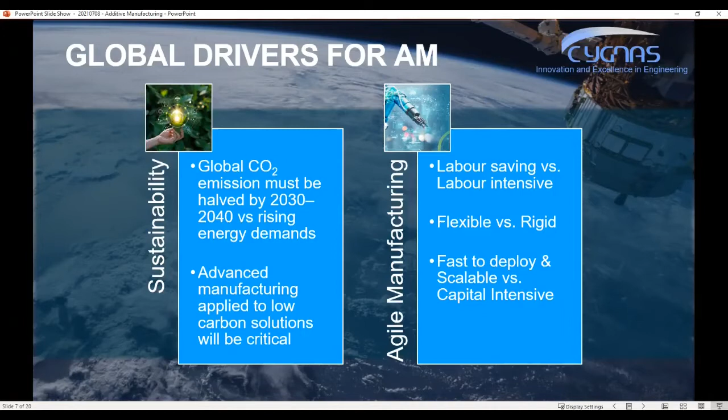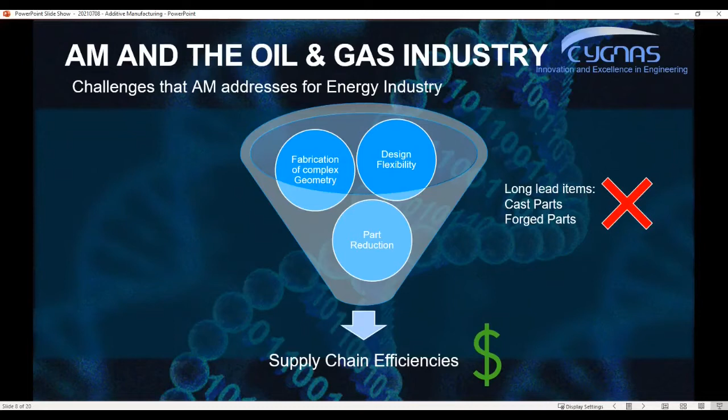Okay, so from the oil and gas energy perspective, there are many areas and applications that can open up. One that we have just mentioned is sustainability, but also fabrication of complex geometry, replacement of parts, spares, reducing the number of parts that you actually require in an assembly, and hence there is saving there. There are a lot of parts that are, for example, cast and forged parts. We've all been there, waiting months and months for forged parts or castings, which in reality could be produced in a very short lead time with high quality results, without waiting for other people to send those parts out to you.

For example, there are parts where there are restrictions on how much you can drill into an object, but with AM, because it's being built layer by layer, you can have very intricate designs, both on the outside and inside, which can be beneficial, for example, for cooling channels or drill holes, or where you need a lot of intricate holes within a structure.

Next slide. So now we're going to be showing you some examples of what has been achieved in the aerospace sector. This is a company. For some reason the video will take a few seconds to load up, Sarah. So we'll show basically how this has already been picked up and used in another sector. This is WAAM manufacturing, which basically uses a kind of directed energy deposition, where you deposit weld material and can then essentially build up layer by layer. Okay, so I'll play this video now.

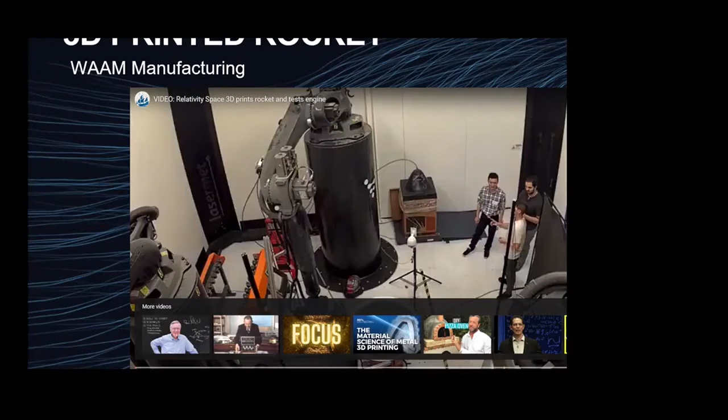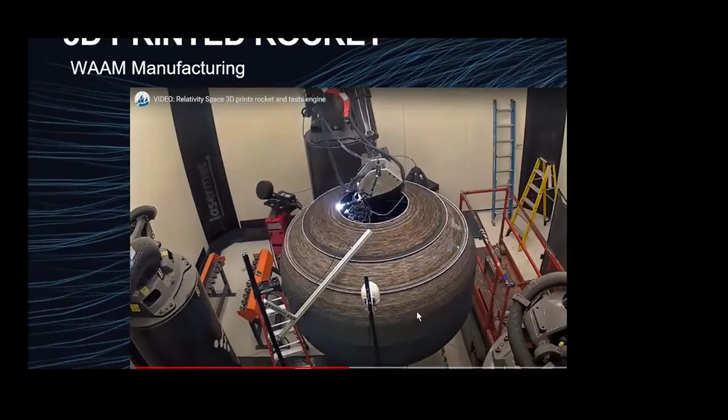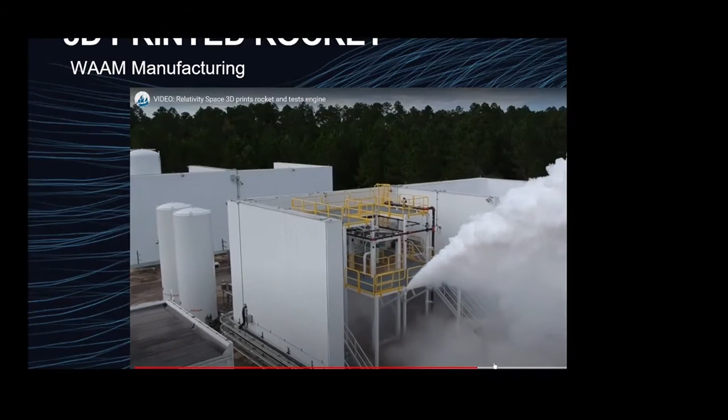So as you can see, you can connect a weld machine to, let's say, a robot, a KUKA robot, anything. And this is a company called Relativity Space, and you can see how they are building this. This seems to be a pressure container, but they can actually use it to build whole rocket structures, pressure chambers, and all kinds of interesting equipment. So what that shows is that the materials used in additive manufacturing are quite robust and able to take a lot of the pressures and loads that you would expect in, let's say, oil and gas.

The second example uses another technique called direct metal laser sintering, which is a kind of powder-based format. You have powder in an enclosure where a laser is used to build the whole thing layer by layer. This is one of the techniques that gives the best strength results, with reduced overall stress, higher quality, higher density and less porosity. So it is used in highly critical applications. The size has been traditionally limited, but now we're getting larger and larger 3D printers.

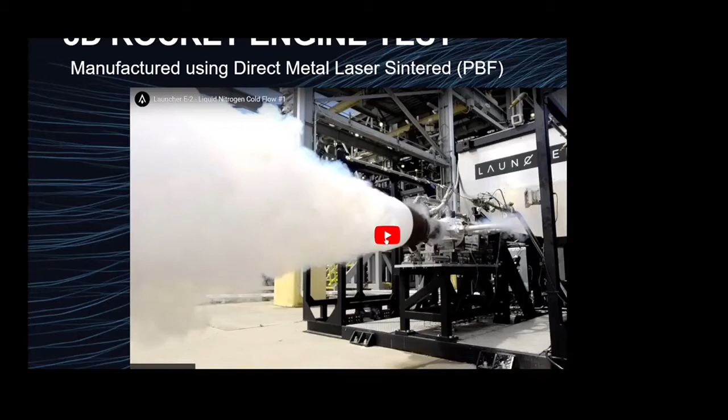So this again is a US-based company called Launcher that used a 3D manufacturing technology called DMLS, based on a machine made in Germany. Yeah, so I can show you this quick video as well. And this is just a video of a test of the rocket chamber.

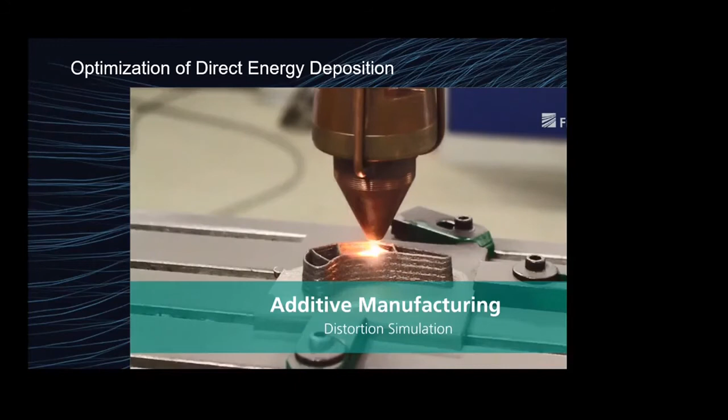Okay, so moving on to the next slide. This is again showing your additive manufacturing with layer by layer being added. This is again based on direct energy deposition. And you can see how the simulation can be used to predict your residual stresses and your distortion, which is quite important.

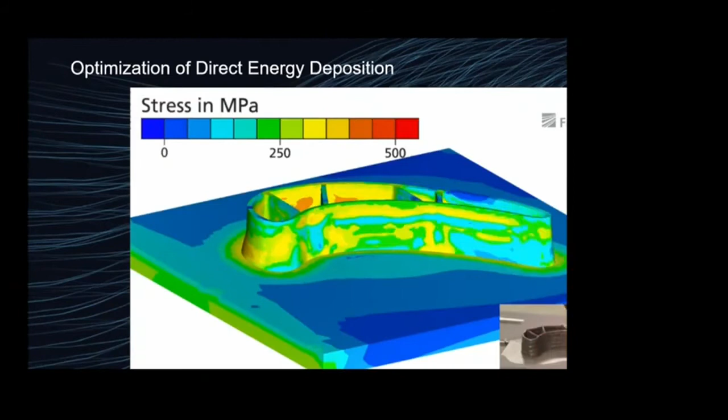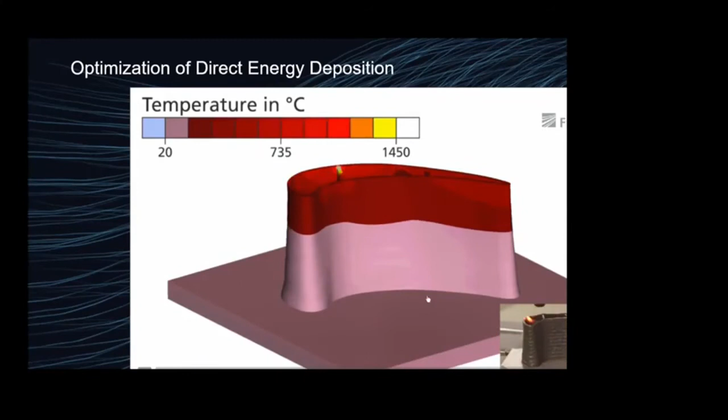And sometimes you need to know how your part needs to look at the end, and then there is some iteration. So especially for larger parts, it becomes important to be able to simulate it in a virtual environment before you actually manufacture parts, so as not to get the part out of the tolerances that you require. Okay, moving on to the next slide.

Yes, so in this regard, we can use two softwares that have been optimized for simulating additive manufacturing processes. Some of the ones that we have just shown you are arc welding, which is WAAM, and direct energy deposition. But these are not the only ones that can be simulated. So you can have powder bed fusion, which is the one that we showed for the DMLS, that uses powder layers that are laser sintered on top of each other and then later heat treated.

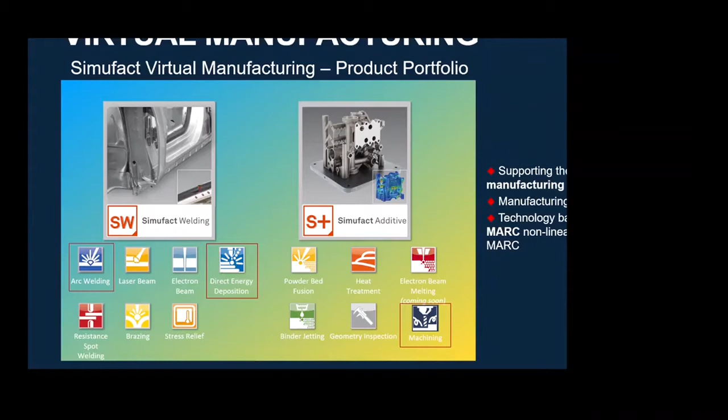So we're able to simulate all of these processes using Simufact Welding and Simufact Additive, which is quite important. They're essentially based on MSC Marc technology, which uses a non-linear FE simulation to be able to simulate the multiphysics of heating, cooling, and even possibly phase changes. Next slide.

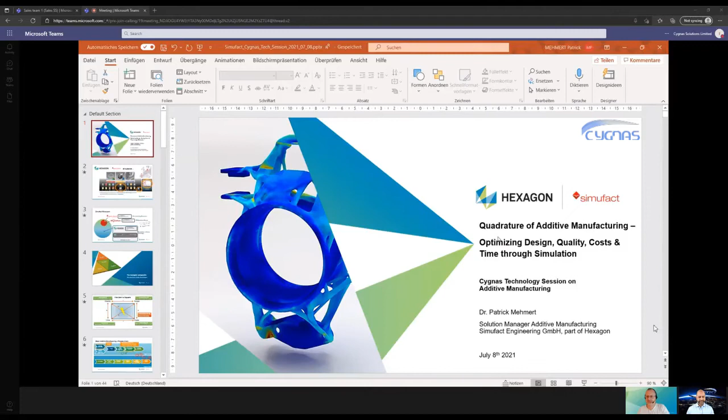Okay, so welcome, Mr. Patrick Mehmert, happy to have you here. I can present now? Yes. Okay, let's try. You can see it? Yeah. Great. If there are any issues, let me know. I will start now. Great. Thank you for the introduction.

So I'm Patrick Mehmert from Simufact Engineering. We are part of MSC and of course also part of Hexagon. And I want to talk to you about the quadrature of additive manufacturing. So how to optimize design quality, costs, and time through simulation simultaneously.

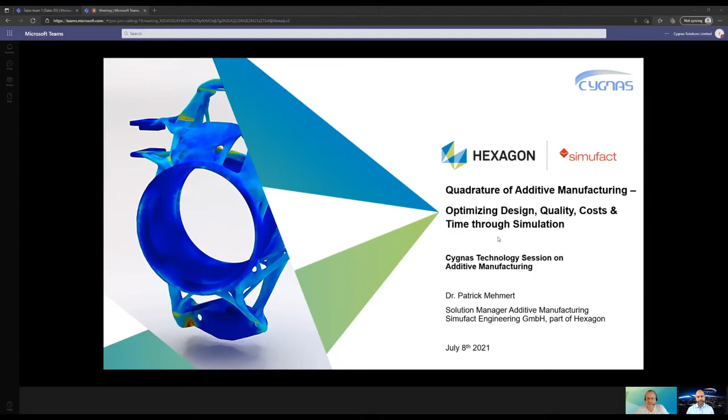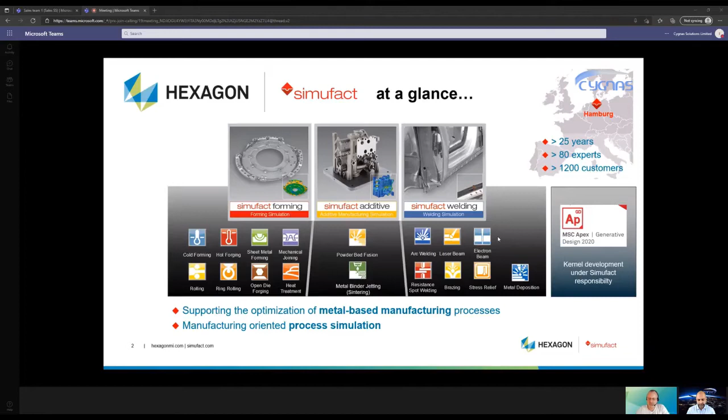So just very quickly, a brief introduction to our company. We are based in Hamburg. We had our 25th anniversary last year. We are a medium-sized company, but we have global business, more than 1,200 customers. Our history is based on forming simulations, one of the most important products we have, but since 2016 we have Simufact Additive, which is able to simulate powder bed fusion processes. There are different names for it, but we call it powder bed fusion. It's a general naming. And also the sintering of metal binder jetting, which in fact is also a powder bed process.

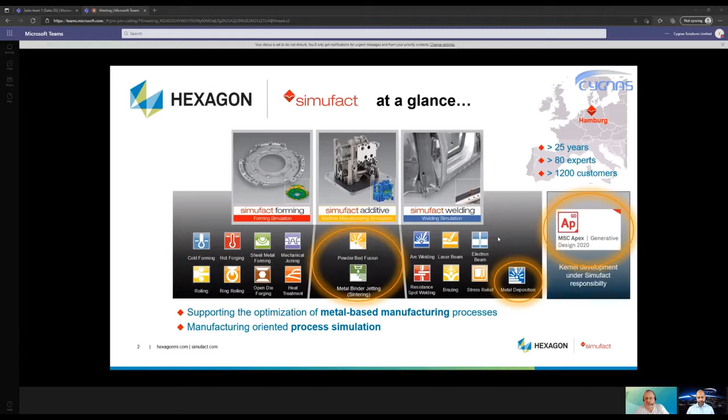In our welding simulation, we can also simulate metal deposition or direct energy deposition. And what is also under our technical responsibility is the kernel of the MSC Apex Generative Design, which is very useful to create really innovative designs for additive manufacturing, which might only be producible with additive manufacturing. So let's go to the topic of today.

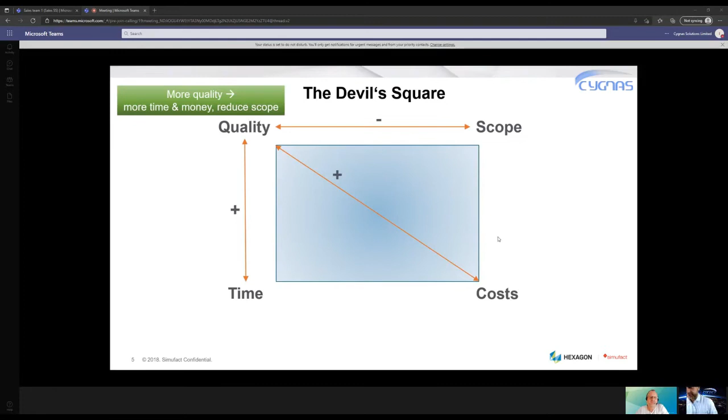So we talk about additive manufacturing, but what is the manager's perspective? They think about cost, quality, time, scope, not necessarily about nice designs. But of course, this is the basis for that. So we have the devil's square of project management. We want to achieve the scope of our project, we want to be on time as fast as possible, and we want to have the least costs possible. To achieve that simultaneously is maybe not possible. It's a challenge at least.

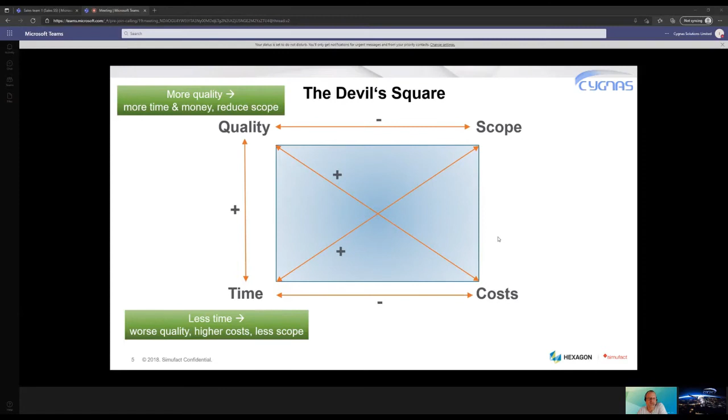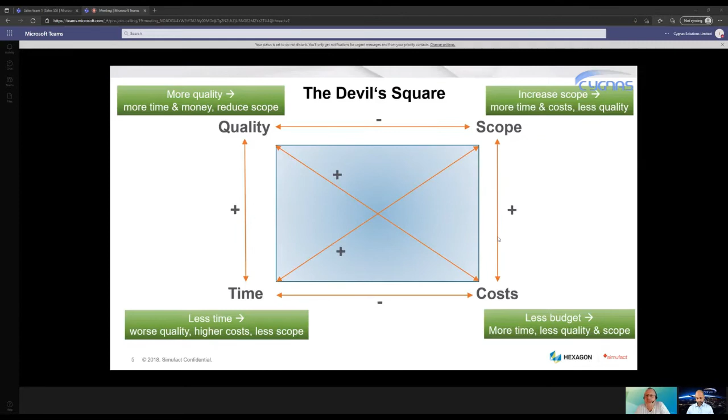So if you want to have more quality, maybe you need to invest more time and money, or reduce the scope. If you want to reduce the time, you might worsen the quality, live with higher costs, and also reduce the scope. If you have less budget, you will need more time, deliver less quality, and maybe have shortages on the scope. And when you want to increase the scope of your project, you need to invest more time, more costs, but you have a fallback on quality.

So in the end, let's talk about the metal additive manufacturing process chain. We concentrate on metals because you need to invest a lot of money to print metal, unlike with plastics. So simulation is really worthwhile here. Often you start with a topology optimization to really get a design for additive manufacturing. Or another application is that you do an optical scanning for reverse engineering, for example, for spare parts.

So really two completely different applications. But in the end, you need to derive a design out of that, because normally you don't get a final design. So you need some designer to do that for you. And then we have the classical way. You do a static strength and fatigue simulation. And of course, MSC has fantastic tools for that, like Nastran, Marc, CAE fatigue, and so on. So this is very classical, but also very important.

And then what we offer as Simufact is the manufacturing simulation. So maybe something that is underestimated still by some people, but it's not only designing and calculating things, you also need to manufacture it. And a lot of things can go wrong, but with simulation, you can improve that. Then when you're happy with your results, you need to go to a build job preparation. The part needs to be sliced, and you need the hatching patterns of your laser and so on, and there's special software for that.

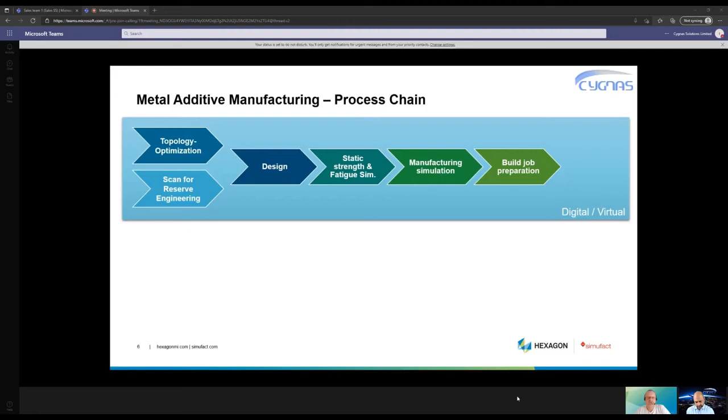And the nice thing in additive manufacturing is that all this is done in a digital virtual way. And that means when you now go on, you will switch into the physical or the real world. So you do the 3D printing, you generate the part. Now you're physical. You do a stress relief heat treatment normally. You need to cut off the plate. So you have a base plate in production normally where you print the part upon. You need to remove the supports that are needed for the manufacturing. You need to do a surface finishing, for example, machining, which is quite common, and a quality control.

So what does this mean in terms of time and costs? So in the digital world, it's quite easy. You can iterate fast, and this will not cost a lot. But if you need to do that in the physical world, so for example, if your print job does not work, if you get scrap out of the machine and you need to reiterate, this is very, very costly and very, very time consuming. And this is really where simulation helps you, because if you are able to prepare your print in the right way, in the digital thread, then you are done also with the physical world.

Okay, so today I will talk about topology optimization, which in our case is the generative design. This one is already covered, so I will not talk about it.

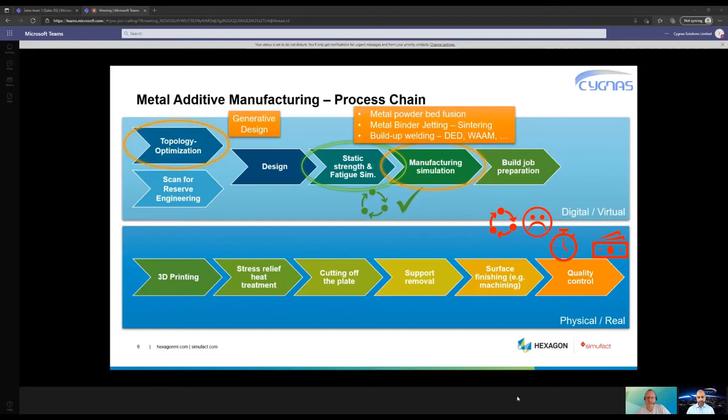So this is the classical way. So this is Nastran, Marc, and CAE fatigue. I will not talk about that today. Of course, I will also present to you manufacturing simulation in terms of metal powder bed fusion, metal binder jetting, sintering, and the build-up welding applications. So let's go to the different topics.

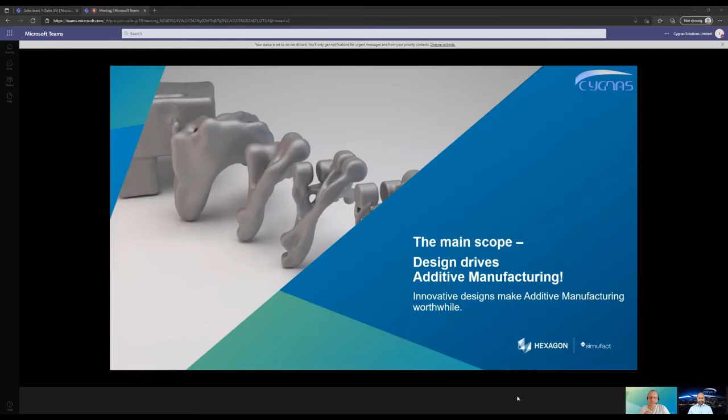What is the main scope of additive manufacturing? You need a nice design. So the innovative design really makes additive manufacturing worthwhile, at least when you create a new part. Of course, it's a different story for spare parts, maybe. Spare parts, you have more like a reverse engineering application. So this is a nice example for a generatively designed part. And what are the objectives and the goals? You normally want to achieve lightweighting, you want to be efficient, you want to reduce time to market, and of course you want to reduce costs.

In this case, there was a 63% weight reduction compared to the original design. Reduced fixation points to 4. I think there were 5 or 6 in the original design. You have one integrated part design, which of course helps in lightweighting. And what is really the clue, this part, as you see it here, has been designed in only 3 hours. So you don't need a designer that is doing that for you. The software gives you the final part that can be printed.

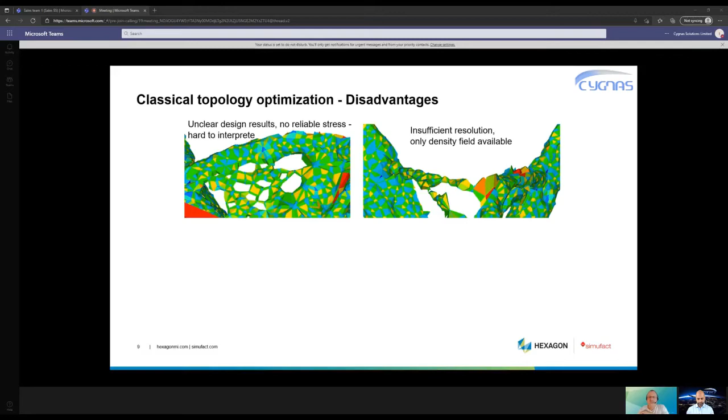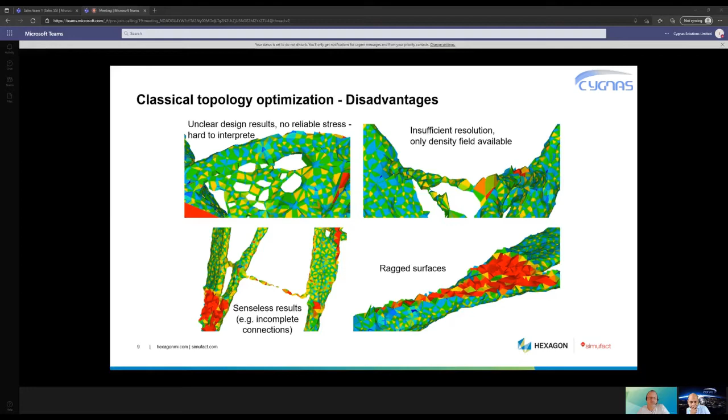So what are the disadvantages of the classical topology optimization? You do not get clear designs. You do not get stresses, and it's hard to interpret what to do with your results. You don't have a sufficient resolution. You get a density field and not really a design. Sometimes you get some senseless results, for example, like this, an incomplete connection. And you have these ragged surfaces, and that is the reason why you need a designer in between to interpret your result and make a design out of your topology optimization result. And this is different in the generative design.

So in this innovative approach, you have a design evolution during the optimization, you have an iterative refinement, and in the end you have a fine smoothened mesh, and you can also export a generic CAD format. And what is the difference?

In classic topology optimization, you don't have a design as a result, you have a density field. You have no stress information, or at least no reliable stress information. And in this case, the stiffness is the target, not the weight. That is the reason why weight is normally reduced by 50%, because people give this as a target, but it's not really a result. In the innovative topology optimization, which we call generative design, you have a final printable design. It's already stress optimized. It's weight optimized in the sense that automatically the least weight is achieved, and it's far quicker.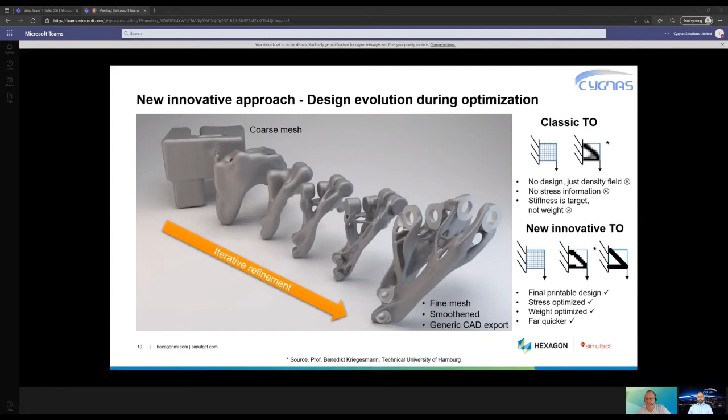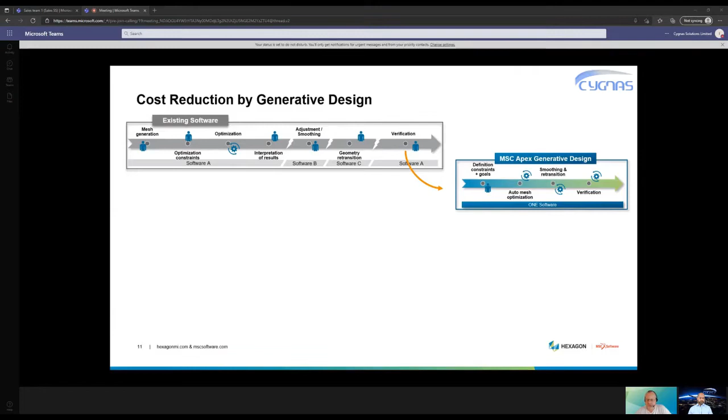And of course, this will help you to reduce the cost by the generative design, because in existing software you need different softwares for the mesh generation, optimization, and then again for the smoothing of the part, geometry retransition, verification. So you need to go back and forth, maybe you need different people doing that, and they spend a lot of time. With MSC Apex Generative Design, you have all that in one tool, and you can do it very, very quickly. So the reasons for that is that you have an automation, you get the maximum lightweighting, you achieve really a dramatic time reduction, and this all helps you to save money.

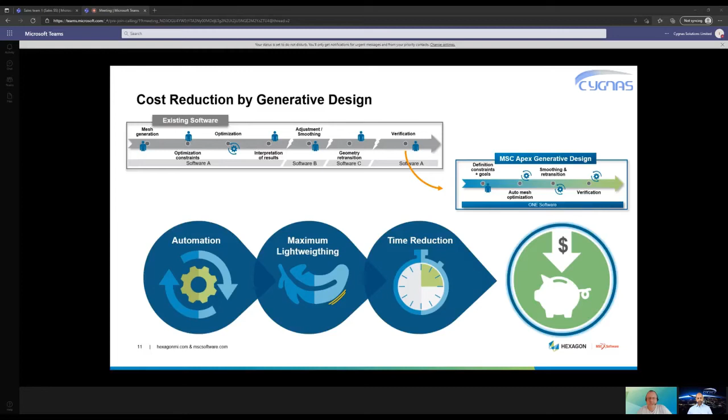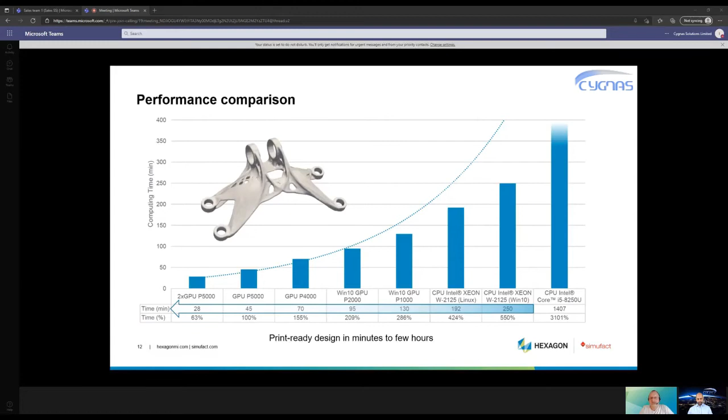So let's have a closer look. If we look at calculation times, for example, the kernel has been developed for GPUs. So this is the fastest way. And in this example, it was possible to get this final part in only 28 minutes. Of course, not everybody has the same hardware. So maybe you don't have a GPU, you have a CPU, but even then, it's in this case like 3 hours. So compared to other technology it's very, very fast, because it's completely automatic. You just start it, and after 3 hours, you have your result print ready.

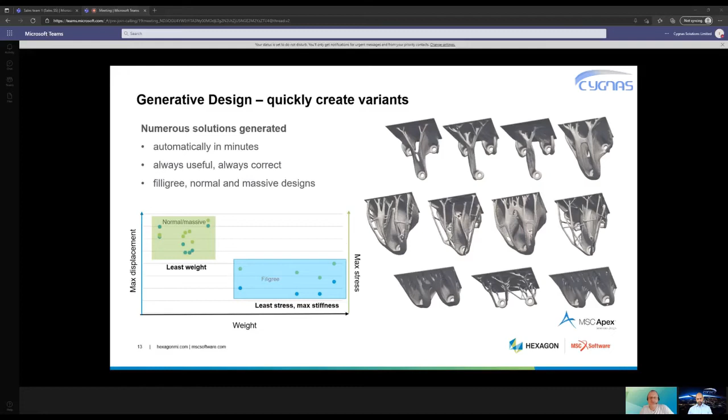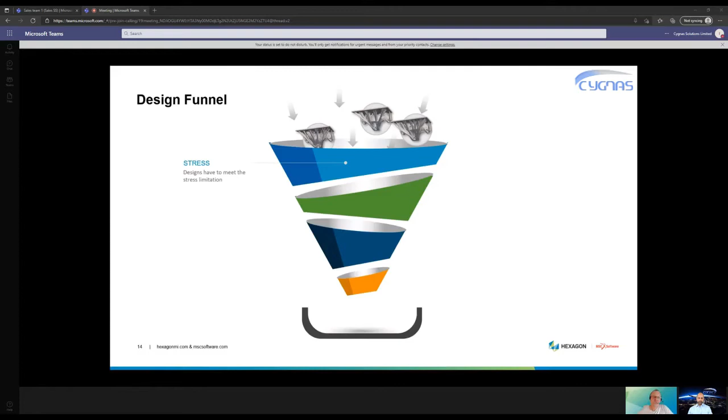Why is it called generative design and not just topology optimization? Because you can derive very quickly different variants of your design. So here's just an example for that. Each design is fulfilling your requirements, but you can even select, let's say, your preference here. And this is what we call the design funnel. So you have a lot of designs which fulfill your stress requirements, for example. But maybe you have other requirements like weight. So maybe you want to select the least weight part.

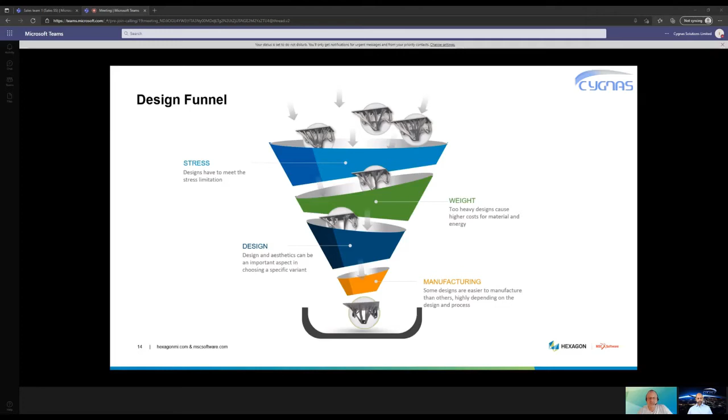Also, the design itself. So how it looks might be a requirement, for example, if you can see the part, an exterior part. And also what part is better to be manufactured. So in the end, out of a lot of designs, you can select really the most appropriate one for you. And this is done all in MSC Apex Generative Design. So it's really one seamless optimization workflow from CAD to CAD.

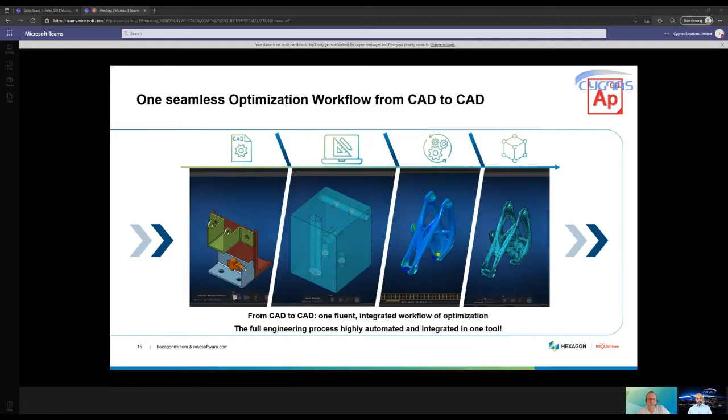So just a graphical example here. You can do all the CAD import manipulation here, including the design space. You get the results and also the CAD export in the end in one tool. So this is what we call an end-to-end process, and we don't need to go into all the points here. But what we covered is the beginning here from 1 to 5. You can do everything in MSC Apex Generative Design. Then you have your print-ready part.

But then there's another step, which we call manufacturing validation. So this is the next point I will talk about. And this is done with Simufact Additive. And then, of course, you can also do a final design validation with Nastran, for example. You already have a stress optimized part, but we call it a pre-assessment, and the final assessment is not necessary, but is a good idea to really have Nastran results and not topology optimization results.

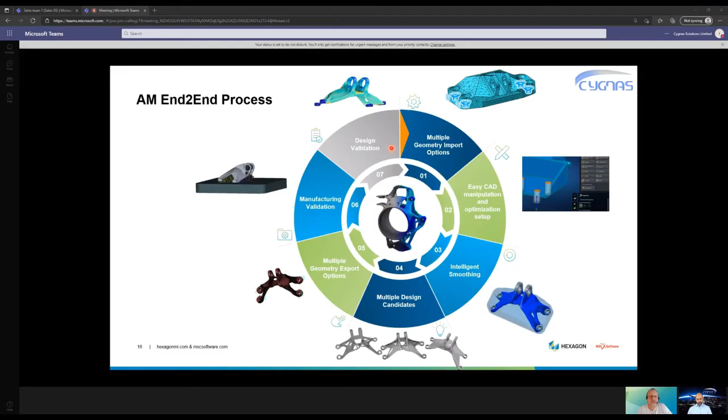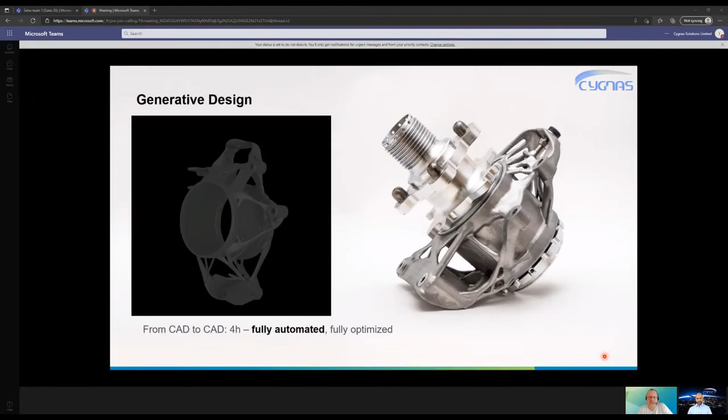Okay, let's have a look at some use cases. So this is a wheel carrier from a Formula Student car, I need to mention. And this one has been designed fully automated, fully optimized. So really, really quick.

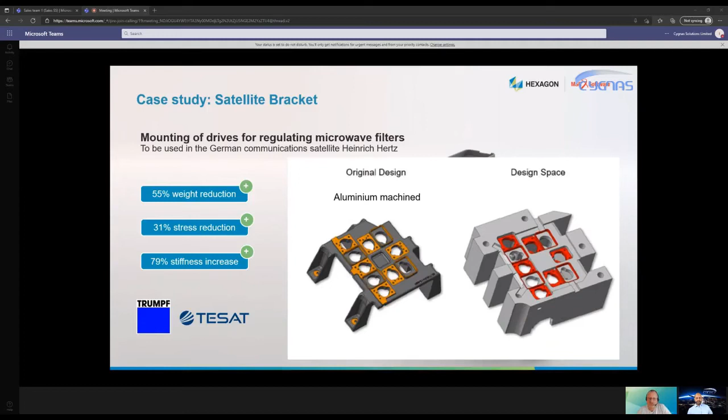And also you see the design space here that was used for the topology optimization. And in the end, you got this part that has been additively manufactured in laser powder bed fusion. The aluminium alloy is different, of course, because you have another process, and it's a typical AM alloy, aluminium, silicon, 10 magnesium, that has been used here. And you see the benefits on the left. You have 55% weight reduction compared to the original design.

On top, you have 31% stress reduction, though you have not even half of the weight. And also you have 79% of stiffness increase. Yeah, so all the parameters have been improved by the optimization.

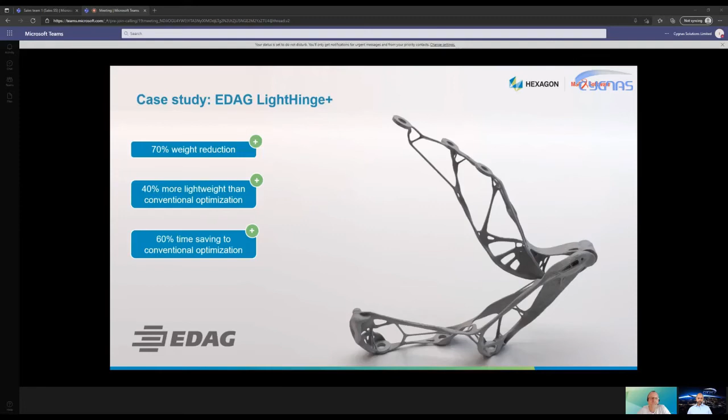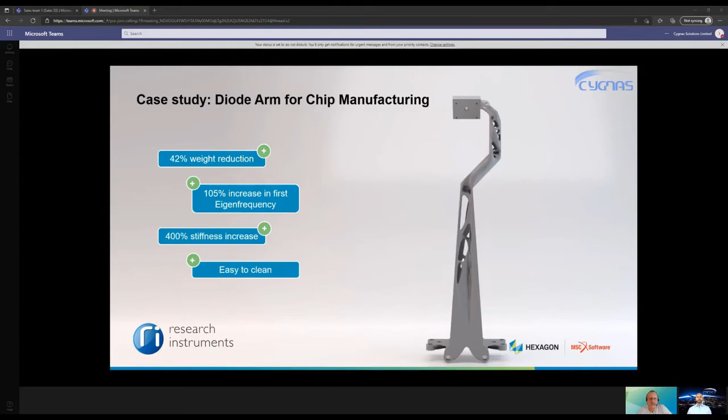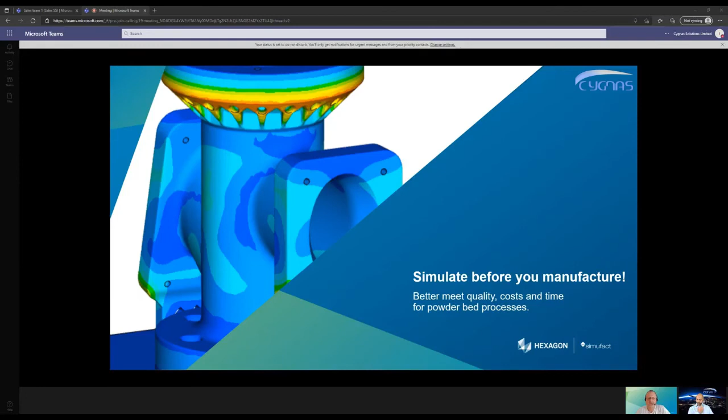Okay. Now let's assume we have the design. So either we have generated the design, or we have scanned the design maybe, because we need to produce a spare part. And now our advice is simulate before you manufacture. So this can be done with Simufact Additive. And what are the key capabilities and benefits of Simufact Additive? In additive manufacturing, it's very crucial how your build orientation is, and the software provides a quick assessment of all possible orientations, and you could select the most appropriate one according to your requirements. You have an embedded cost estimation, so you can also optimize versus the production costs, or give a quote, for example.

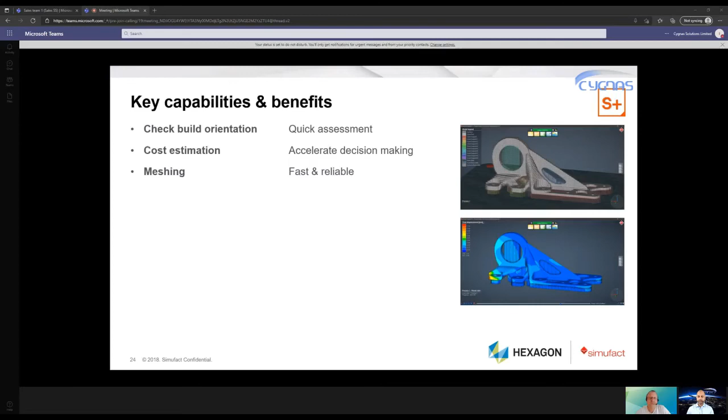The meshing is absolutely fast and reliable. So in additive manufacturing, and we have seen that before, you have complex filigree parts most of the time. We use this voxel meshing with some technical tricks in the background to make it numerically reliable. So it's just pressing a button and everything is meshed quickly and automatic and reliable. So it's not possible that the meshing fails like in other cases. Support structures are a very important topic in additive manufacturing. You can create support structures with the software, and you can optimize them, of course, also simulate, assess, and so on.

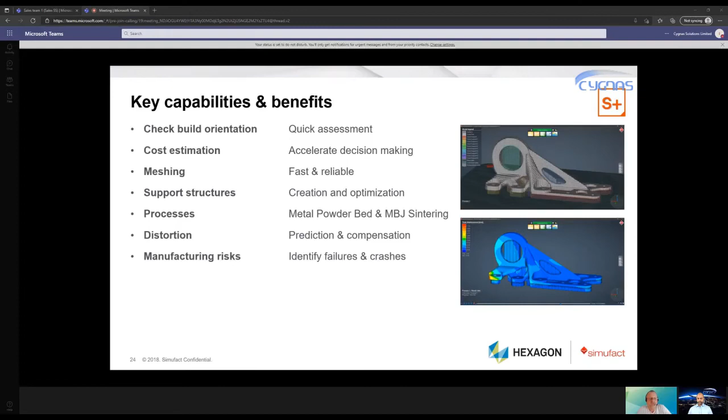Which processes are we looking at? As already mentioned, metal powder bed and metal binder jetting sintering. And what are the results? What is the outcome? So you can predict the distortion, and what is even more important, you can compensate it in a very nice way. So you can print your parts straight, instead of having distorted parts out of the machine. You can assess the manufacturing risks, identify failures and crashes, and mitigate them before you print. So stay in the virtual world, optimize the print, and then go to the real world.

And also you have a look at the process chain. So it's not only printing a part, you have a lot of post-processing steps that you need to consider, like the stress relief, heat treatment, cutting from the plate, support removal, and so on. And all this is covered by the software.

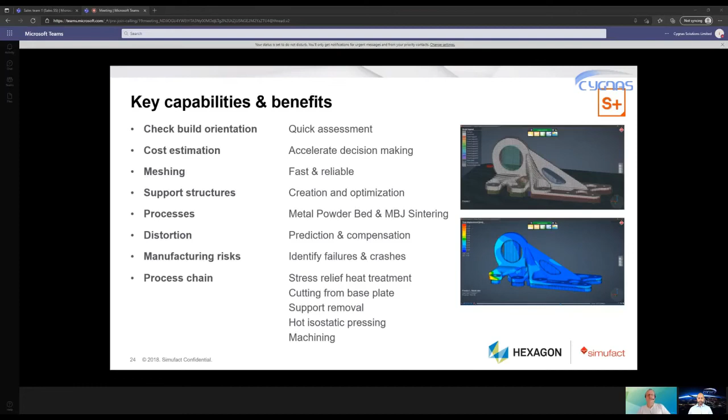So very quickly, we go through the different criteria here. So we have the build orientation assistant, that you can optimize your print orientation versus supported area or the support volume, because you need to print and remove everything regarding the support. So it's additional effort you want to minimize. You can minimize the projected area to put as many parts as possible into the machine. Design height and costs can be minimized, or also local minima, if you want to avoid that. So you have a very intuitive interface here to select really the most appropriate orientation.

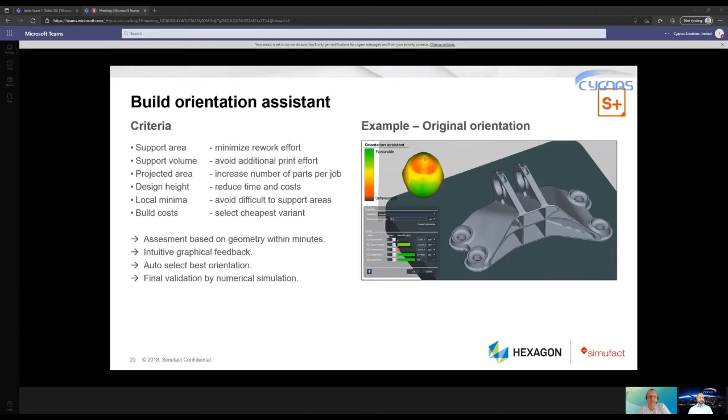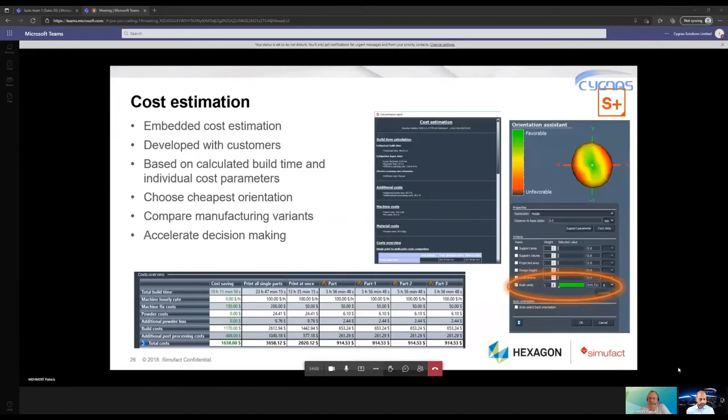Embedded cost estimation has been developed with customers that are doing production, and this really helps you also to optimize against costs, not only quality.

So in the metal powder bed fusion, there are different ways to simulate. And one, or the most popular way, is what we call the mechanical simulation, which sounds a little bit strange because we have a thermal driven process, but you can reduce this to a mechanical problem, and that makes a simulation really fast. But still the results are very good and reliable.

You can see this on the slides. On the left side, you have simulation results. On the right side, you have measurement results, and they are matching really well. And also on the bottom middle part, you see a correlation between measuring points which is really, really nice between the simulation and the measurement. So it's a very reliable way to simulate. Calculation times are typically dependent on the model, of course, some minutes, few hours, not more.

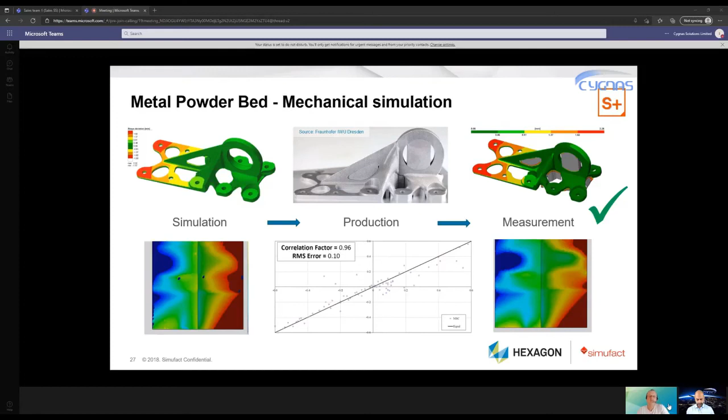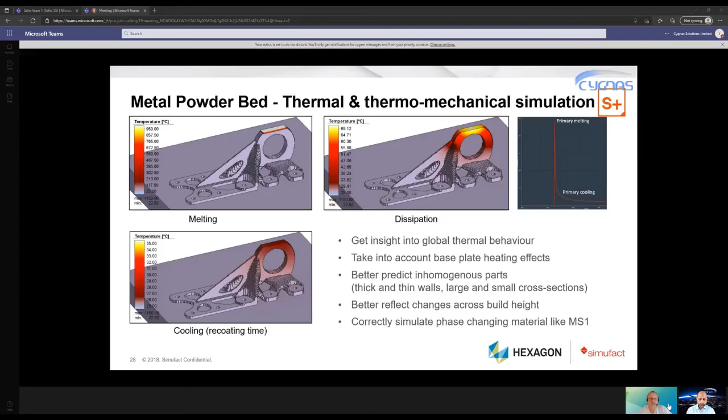But there's another way to simulate this type of additive manufacturing. You can do a thermal simulation to get an insight into the global thermal management of your production. And also you can do a thermomechanical coupled simulation, which is a different approach. It will take more time, of course, but you get a deeper insight. And also you can do things like phase transformation here, for example, and get a better understanding of your printing process. So both methods are suitable to identify manufacturing risks.

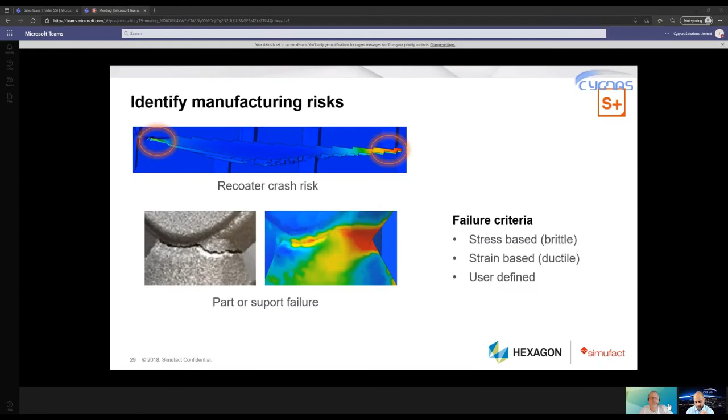And what people fear most is a recoater crash. So you have these recoater blades that are applying the powder layer by layer. And if it crashes with an already produced part, then your production stops. And that is really the worst case scenario. This can be predicted by the software. Also things like part or support failures, which are stress or strain driven, can be assessed and mitigated before you print. When you look at the subsequent process chain, some examples here.

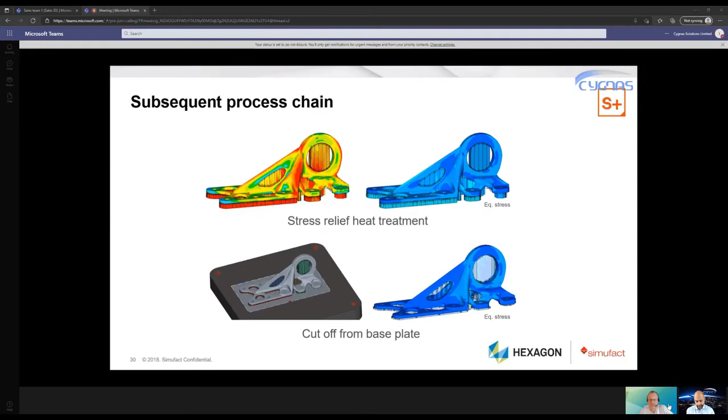For example, stress relief heat treatment, of course, you have a significant stress reduction, but a lot of times you still have some stresses. And when you cut off the plate on the bottom part, you have an additional stress reduction, which is linked, of course, to an additional deformation. Yeah? And you need to know that before you print. And you can also compensate that. So you can compensate in a way that after removing the part from the plate, it is straight and it is within your tolerance. It is a really very nice application.

Support removal can have an influence on your part. Not really on this one because it's quite stiff, but it can. And also, but that is more an aerospace application, maybe hot isostatic pressing has another influence on the distortion, on the stresses, and of course on the densification of the part. This can also be simulated.

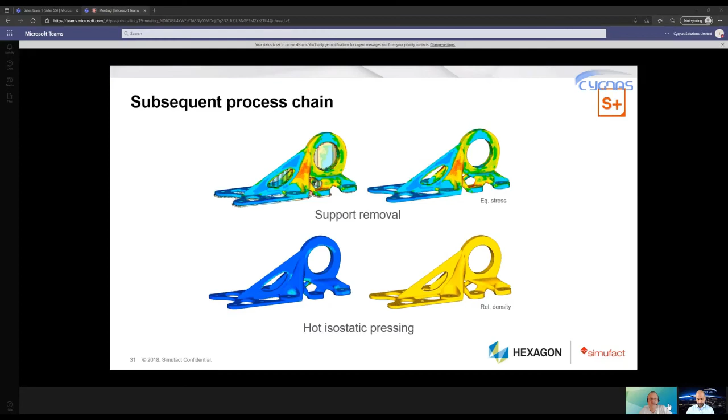Apologies, Patrick. I know we started late, but if it's all right, we just have 5 minutes left from your presentation, just so we have enough time to answer any questions at the end, if that's okay. Yeah, try to be quick. I think there are not that many questions, so yeah, just, you know, take it. No need to hurry too much.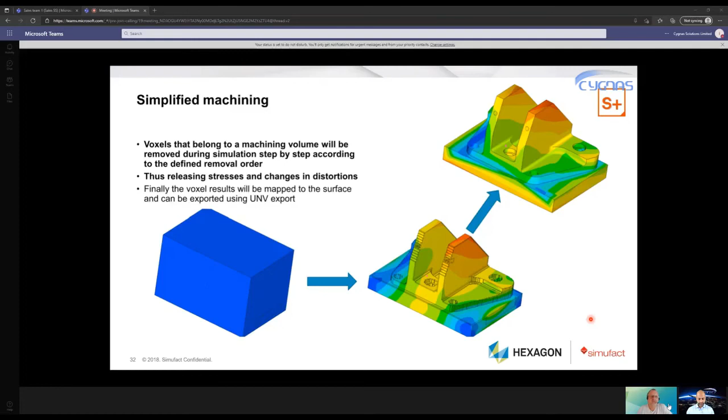It's fine. Yes. Okay. So by the latest release, we have introduced also a machining simulation, which is funny because we have an additive manufacturing and of course included a subtractive manufacturing, but it's a typical post-processing step that can also be simulated. And in metal binder jetting, we have the sintering simulation. So in metal binder jetting, you do not have a laser that is melting particles, but you have a binder agent that is binding the powder particles. That means you have a sintering step afterwards.

And during the sintering, you have a very high densification of the part. You have a high shrinkage. But the shrinkage is not uniform, and that means you get a distortion while it shrinks. And this is also a challenge, but you can address this with simulation. So we can see the videos here, how the part shrinks, and this is unscaled, so it's scale 1. So you have like a 30 to 50% shrinkage. You can predict that, and you can also do a compensation

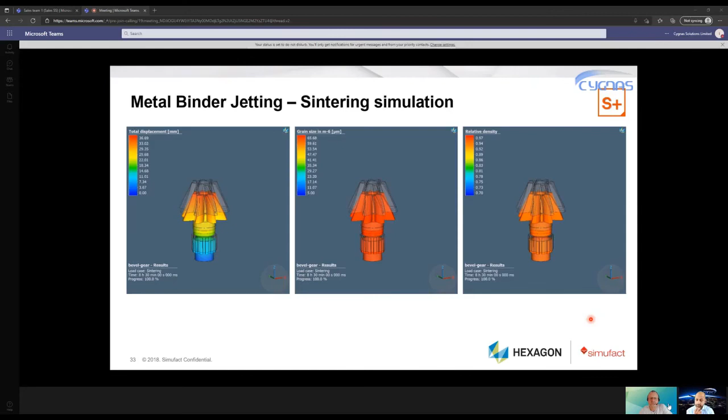for this. So this distortion compensation is really like the killer functionality of the software. You can do it in an automatic iterative way, which really gives very good results. You can almost drive your distortion to 0 by applying localized pre-distortion to your part.

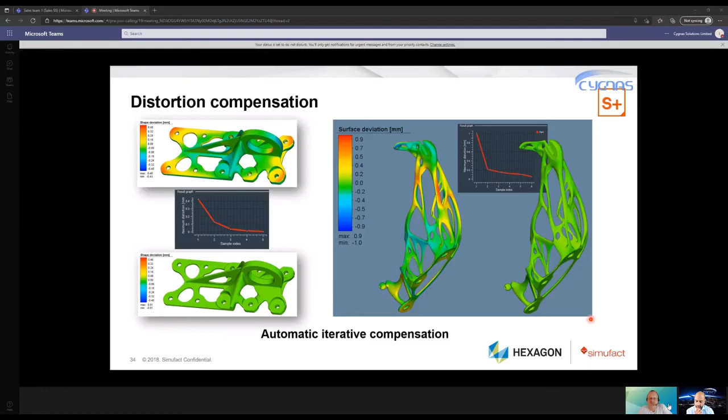Okay, when we now have a look at the generative design in combination with the manufacturing simulation, then the generative design might put out a lot of suitable designs. But then you can do the manufacturing assessment, and maybe some designs are not as suitable as others. So you make a pre-selection here. And then the final selection can be on price.

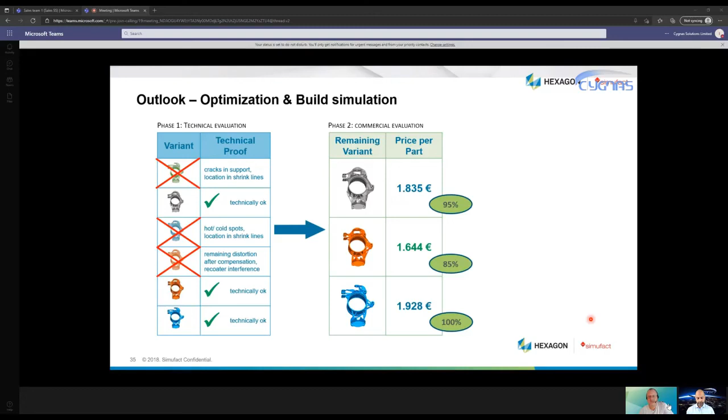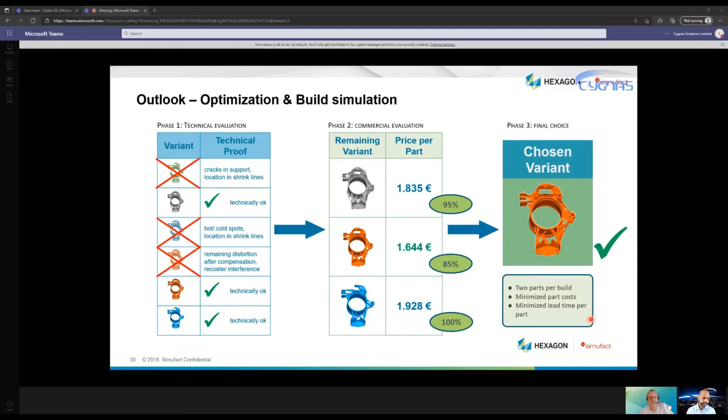So of course you use a part that is fulfilling your requirements, that is manufacturable, and that has the least cost. So in the end, you really get an optimized part, not only in terms of functionality, but also in terms of costs. So this is a very generic return on investment example. For example, if you use the software and you can avoid a lot of crashes or a lot of quality issues, then a return on investment within 1 year is the normal case and not the exception.

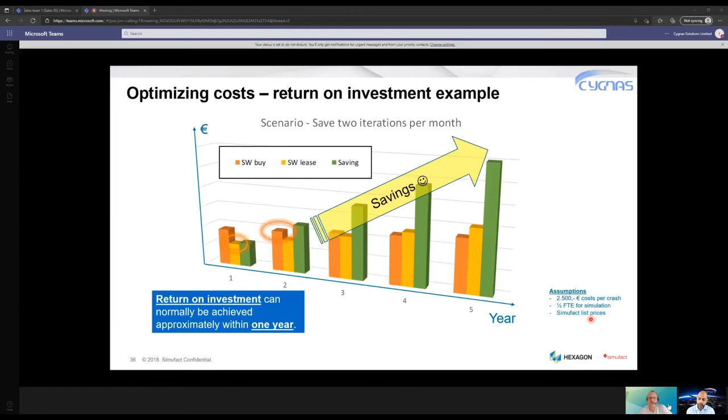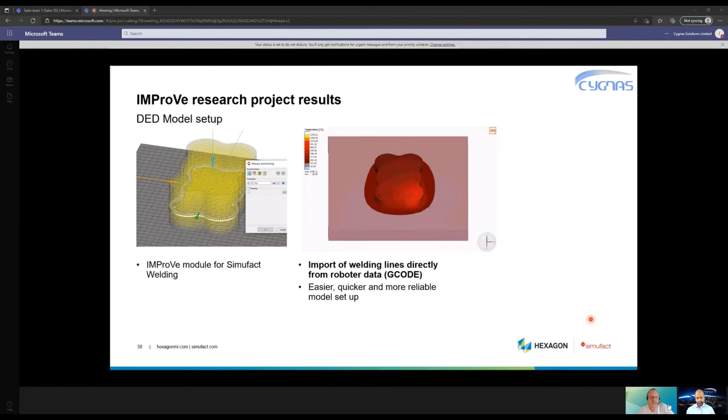Okay, let's talk a little bit also about directed energy deposition. I think Kura mentioned that at the beginning. You can do that with our welding software. Of course, calculation times can be very long still, but the modeling time has been reduced drastically. So you can import just G-code and the model is set up more or less automatically. So you have an automatic geometry creation, an automatic meshing, automatic model setup.

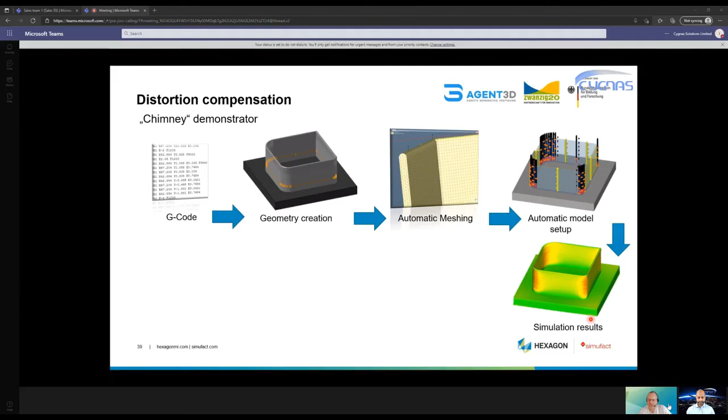And when you have the simulation results like here, you can also do the distortion compensation for the build-up welding, for the direct energy deposition. You can translate this again into a G-code, go to the machine and print it, and have this kind of optimized part, or maybe optimized manufacturing in this case.

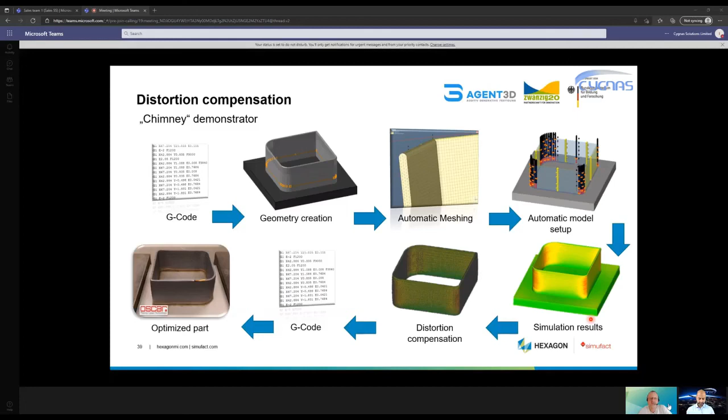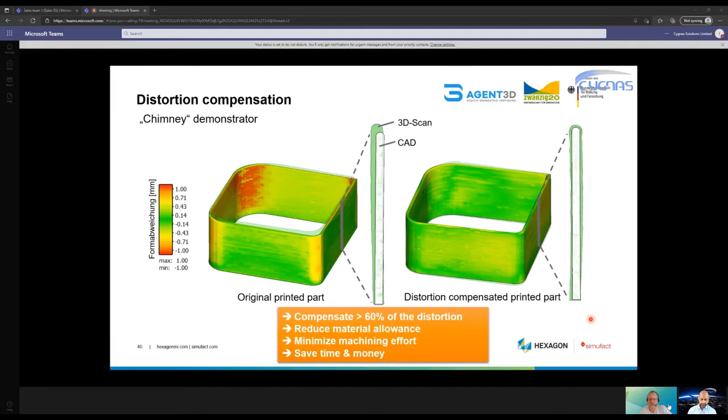But you can see on the right side, if you do the distortion compensation, the part is much better within the tolerances. So anyway, you need to do machining, but when you do the compensation, then you can really reduce your material allowance, you can minimize your machining effort, and again, you save time and money. So this is really an issue in the build-up welding.